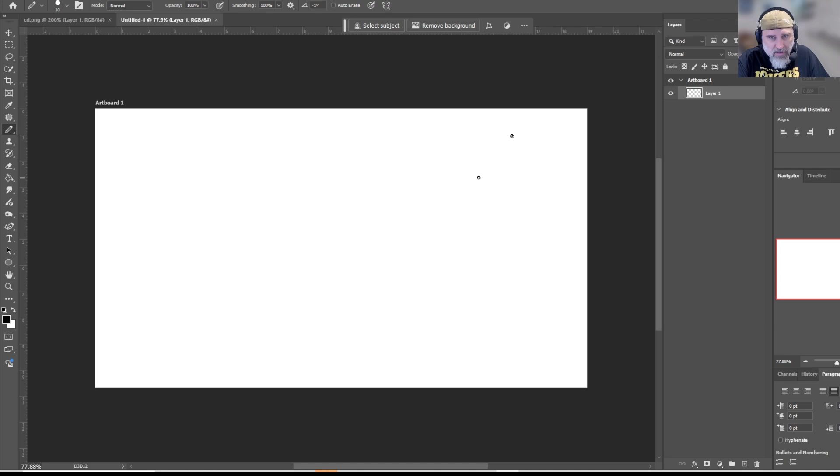So that's not what I wanted. Anyway, see, it's got a hole in the middle. What I was thinking is, I've got a wall. Photoshop's not the best thing to do when you're recording. I was thinking a little bracket that could hold the CD. Basically the CD goes right here. It's a floating shelf. Let me do maybe a little side view. Why is this so slow today?

You know what, Photoshop's not the right thing for this. Let's just kill that and go straight into Fusion 360. I'll just draw it in here and explain what I mean.

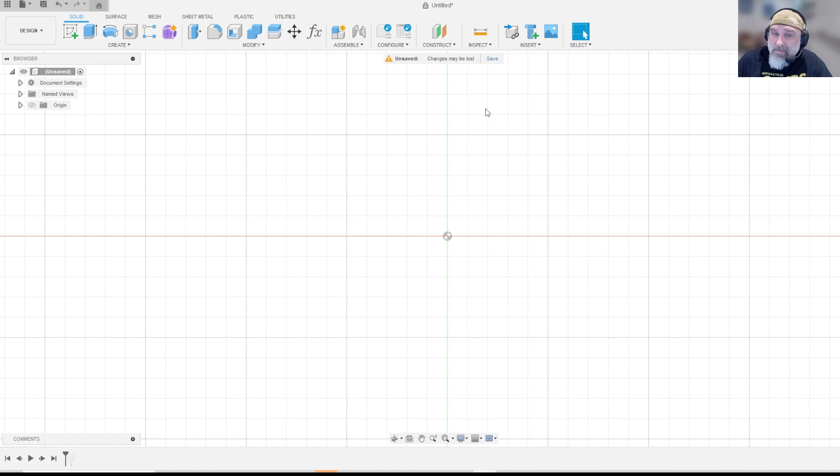Let's create a sketch, start from the top. What I want is, actually before I do that, let's go back. Move my graphics tablet out of the way. I guess I could start over this video, but you can follow me along. First, let's set up some parameters. If you haven't used Fusion 360, this isn't really a Fusion 360 tutorial, I just need to do something with all these stupid CDs.

So the diameter is, in millimeters, 120 millimeters. If I learned how to type, outer diameter. I watch all these videos where everybody does things perfect because they cut all the bad stuff out. Alright, so that's 120 millimeters. If you're curious how I get that, calipers, CDs.

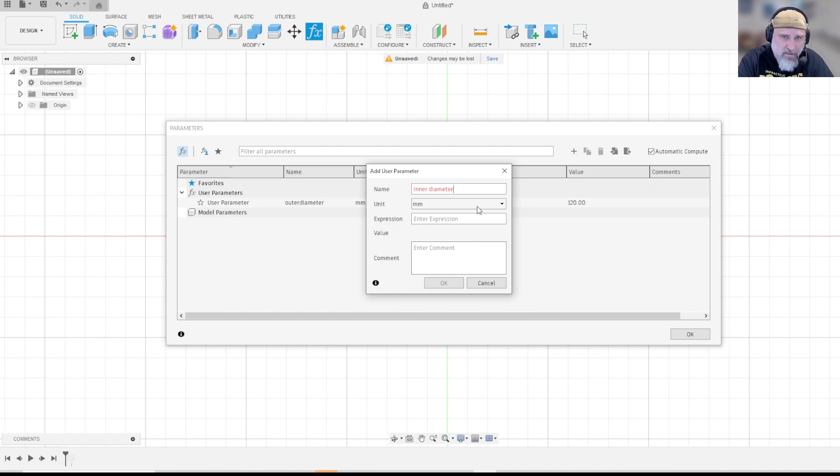Inner diameter, without a space, is 15 millimeters. The thickness is 1.15, at least for the ones I have. Oops, did not mean to do that. Okay, hit OK. So now let's create a sketch.

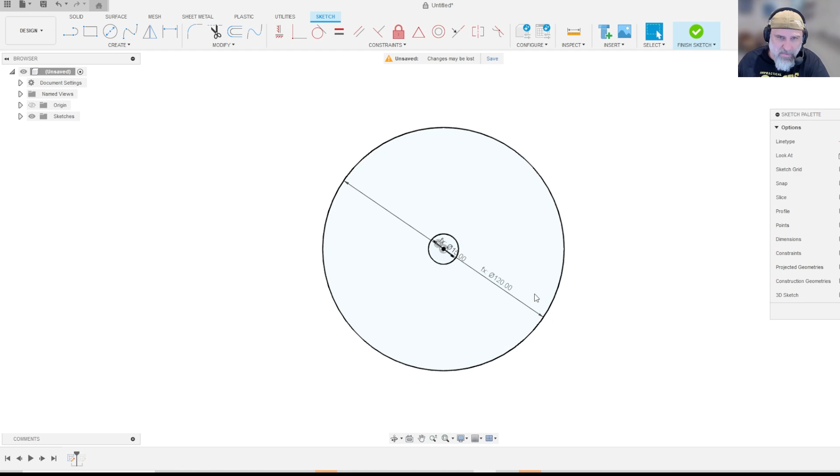On the top, I'm going to do inner diameter, hit enter, outer diameter, hit enter, drag these over here, put them at an angle, actually put them up here. Close Photoshop. Anyway, it also says in Photoshop, I found a picture of it, just to make sure.

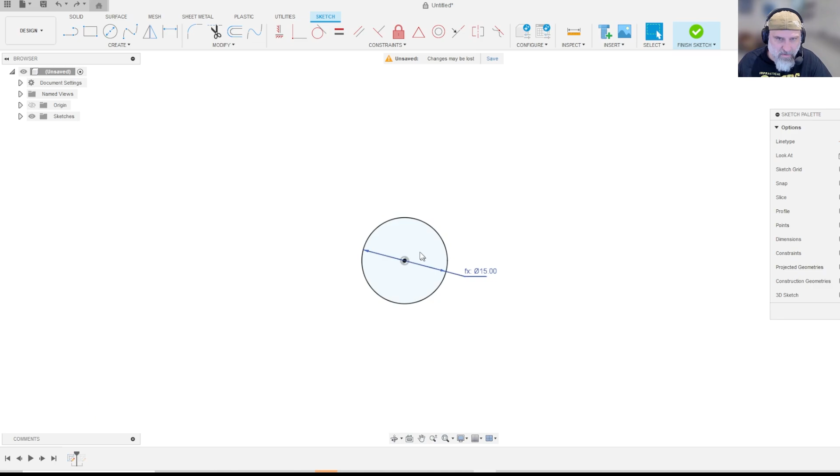Does that look off from the center? Now I'm confused by that. Delete, delete, delete. Let me go. Undo, no undo, there it goes. Yeah, that's the center, it's weird. Dead center, that one's off. How was that one off? There it goes, outer diameter. Hit enter, drag these things out of the way.

What do I want to do? I want something simple, I'm thinking it'll cover. Let's do a square. Touch it to the middle so it gets a straight line. Touch it over here so that it goes straight. Fine, I'll make it go straight after that.

Let's go with 65, sure. And the tangent to make sure this line is touching this line there. This line touches this line.

Since we're 3D printing, I don't want to use too much plastic, so I'm just going to cut this. Let's go to the center, to the side, click. Go here to here, make some lines. Alright, good. So what do I want to do with this?

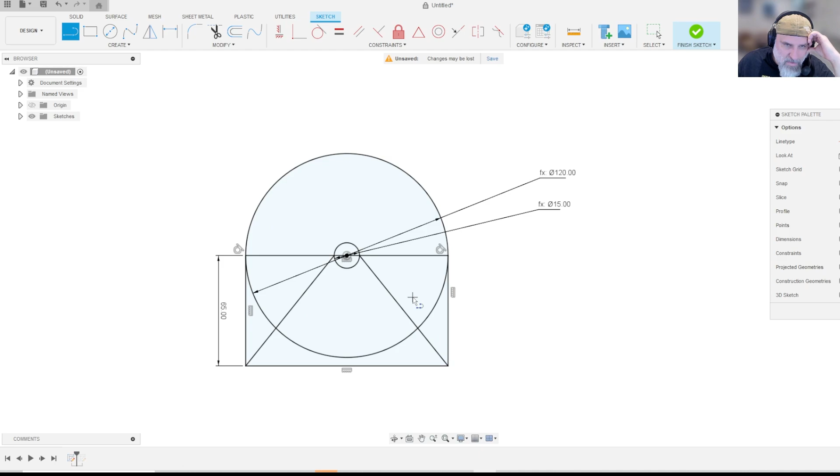I want it flat, or actually I just want it straight. I don't know how creative I want to be. Let's see, we need this. Actually, what I want is to make a square. Escape, from here to here.

Let's go down, so that should be, if I could spell, outer diameter, should be the same size. And then this one, let's just make it 2 millimeters. Probably don't need that, I'll explain that in a minute. Okay, let's finish this sketch.

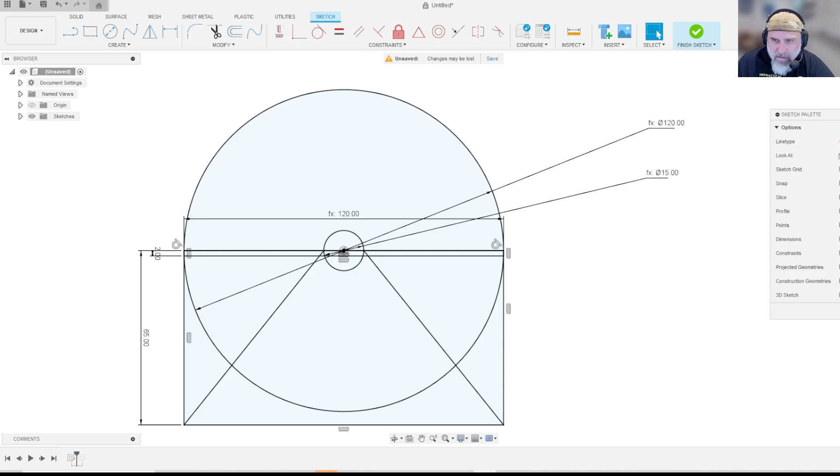That's from the top angle. So from the side, I need something to screw into the wall. How big do I need it? CD, it's... what is that? Let's just go 30 millimeters and see what it looks like.

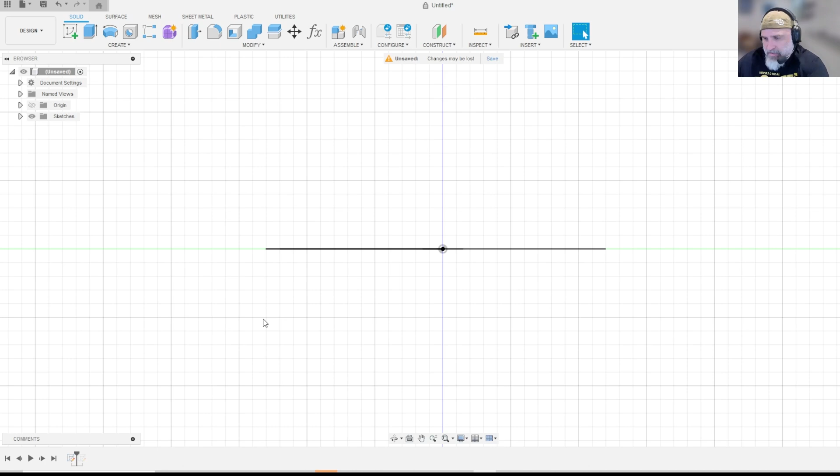So let me go create sketch on the right plane, and I'm going to angle it down just to see. So that's 65 millimeters out. So I said 30, so that means start at 35. So let me just create a square that's 65.

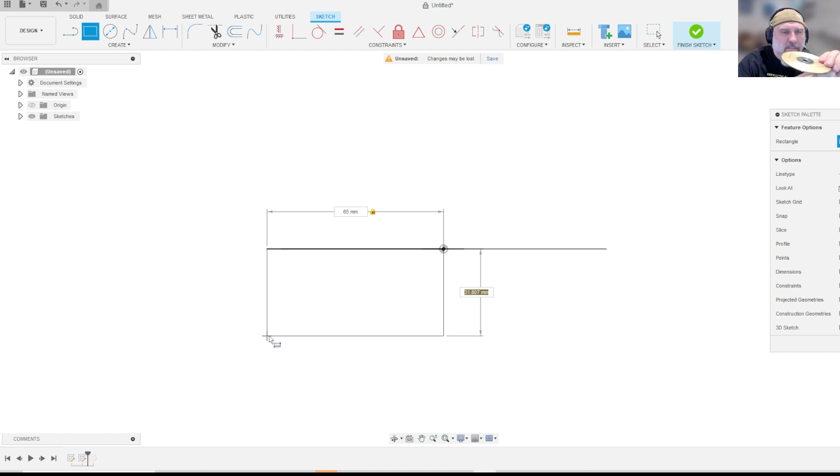Don't need that, just needs enough to hold probably 2 screws. Let's go with 40 millimeters. So, okay, and then I want another one. I said 35, I believe. So let's do 35 by 40.

That way it just cuts it there. And then I want from here to here, but I also need some thickness in this. But this will give it the thickness, so it'll expand up, and then I'll expand that way. Let me think, oh, I know what I can do. Let's go find the center point right here.

It's not a circle, but shouldn't need that much material. 30, so we cut that. If we cut that off, we give it little brackets. I'll explain more what I'm doing once I figure out what I'm doing.

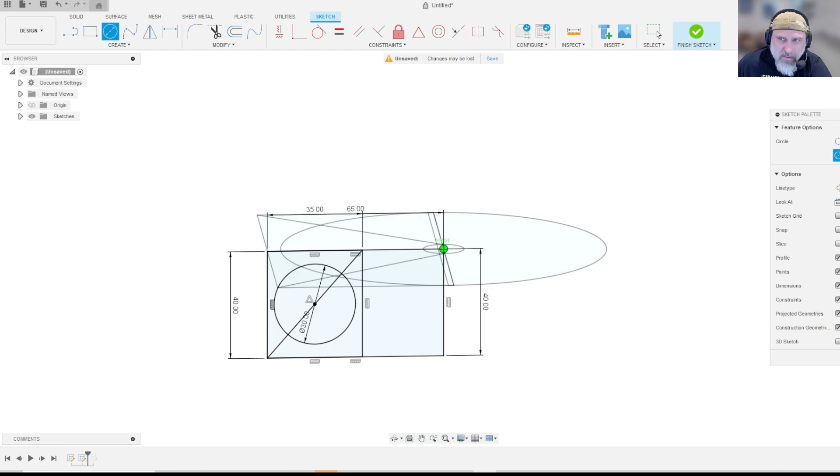I'm just designing in CAD real quick. Let's go ahead and put 2 little circles here too. Now what does 15 look like? You know what, let's just go with it and see what it looks like. Once I throw one more circle down here. 15, 15 is too big there. 10, oops, 10, let's go with 10.

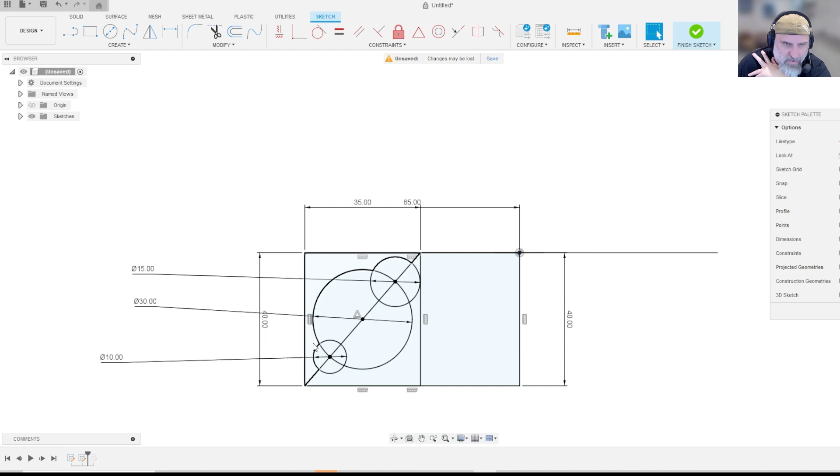Okay, and then drag all the numbers away because I want to see what I'm working with. So that's the shape right here that I'm getting. I'm going to extrude from that side, and then that. And then I'll work on the next sketch after I'm done with this.

Okay, so let's go in here. Let's turn off sketch 3. Let's go to the top. Okay, so what I need first is I want to have this.

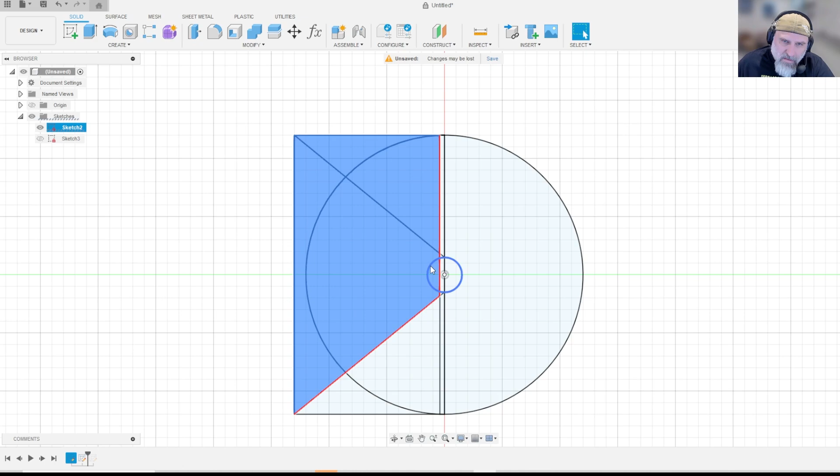Do I want to have that? Does it need that support? I don't think it does. Don't think it needs any of it. Well, let me think for a second. I'm trying to make this with the least amount of plastic possible, because that's the whole point of using the CDs as shelves - that's what's going to drive the strength.

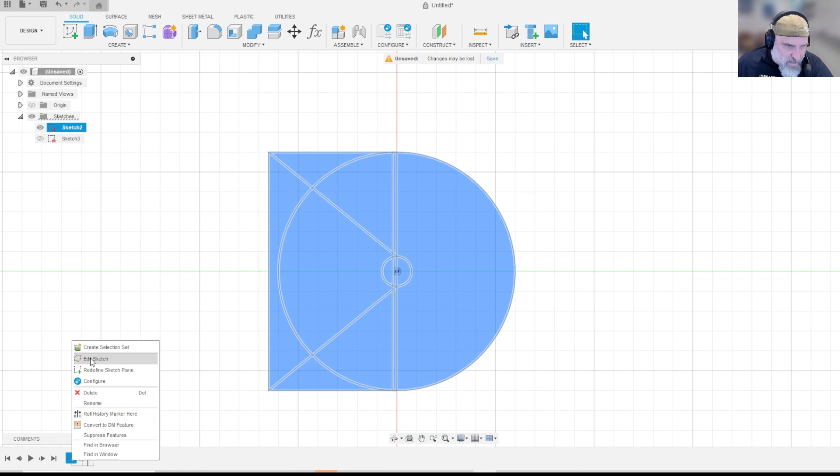Actually, I have an idea. Let's go back to edit this first sketch. Let's do a few more things. Move where I need you.

Alright, so let's go this spot to this spot. Oh come on, stick - there you go. And then stick there, perfect. Let me make sure that this is tangent to this. We don't want the lines blue. Let me put in one more box in here.

This one, let's go to just 30. So this, that - okay, let's go with that. Finish sketch. Give me somewhat of an angle so I know what I'm looking at.

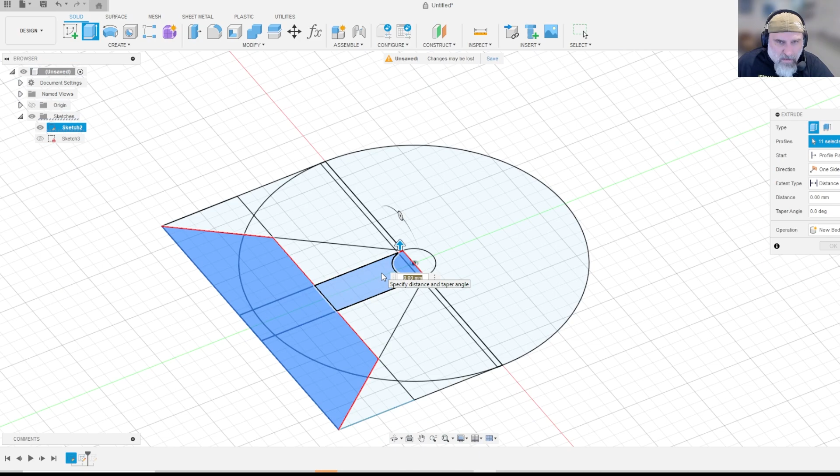So I want to extrude. Oops, did not want that. This and this - oh wait, gotta remember to get those. Alright, start with that, E, and then we're gonna go thickness.

So that's the thickness of the CD, because I figure might as well make this the same thickness. Alright, that's what we got so far. Turn the sketch back on. Now I need to make the part that holds the CD. So let's go undo the body for a sec.

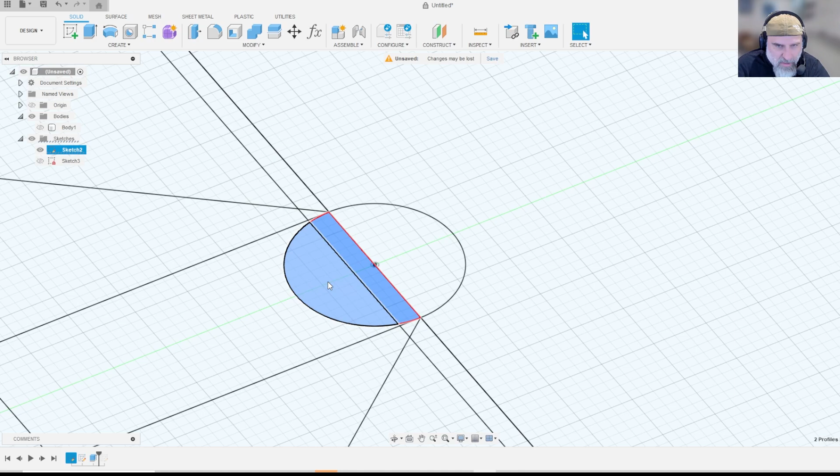So this part is going to extend this part and this part and this part, right? Yes. And then we're going to push that up. We're going to start on the profile plane of the top of this with the distance of the thickness. And we're going to have a taper angle.

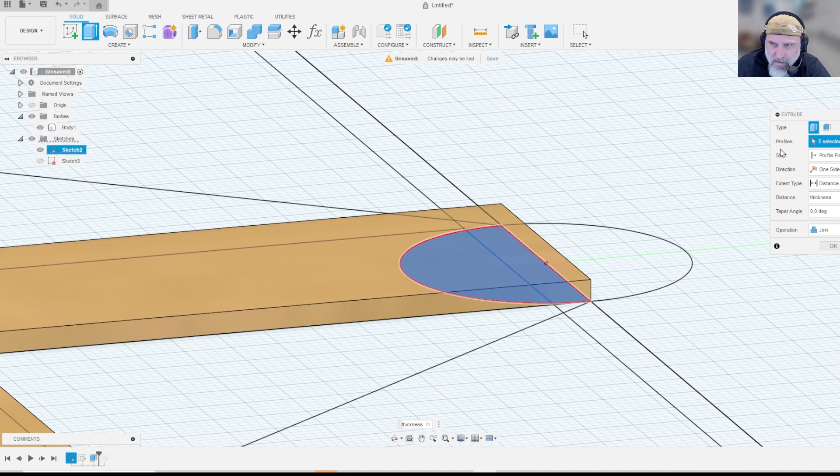Let's take a look at the... wait, we're going to join, not cut. Oh, offset is what I meant to do. Right, we'll do offset, this. Why is it not doing it? Okay fine, offset - having issues. Anyway, now you see what I'm trying to do.

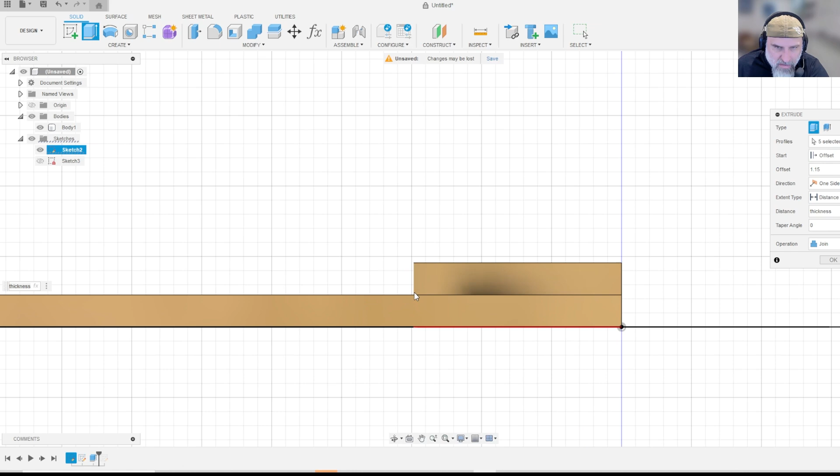And then I want a taper angle of 10. Now is that making the top bigger or the bottom smaller? I guess that's the question. So if I put that right at 0, it's making the top bigger. So what I want is the bottom to go in, not the top to go out. So I'll worry about that in a second, because it should be a perfect fit right now as it is.

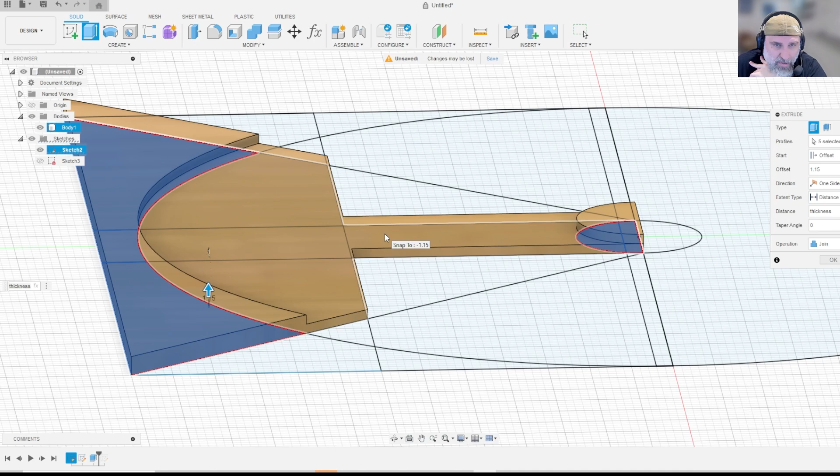Actually, do I want the thickness as the CD? What I want is it's going to have something to bite onto, but not too much, so maybe just the taper will do. Yeah, we'll see, I'll print it out and see what happens. Okay, let's go with offset, one side, thickness, join, hit OK. Let's get rid of sketch 2.

Alright, now for this side, go to sketch 3. We want this, I want that to extrude. Actually, I want it to be the whole length of this, so both sides - I think I'm going to have to symmetric. Do it all the way and then cut it off where I don't want it. It's interesting looking, but I'm okay with that.

Guess I don't need it the whole way. I just need it over here and over here. We'll call this join, hit OK. Now let's go back to sketch 2. Let's take this, all of that. Right, go back to this angle.

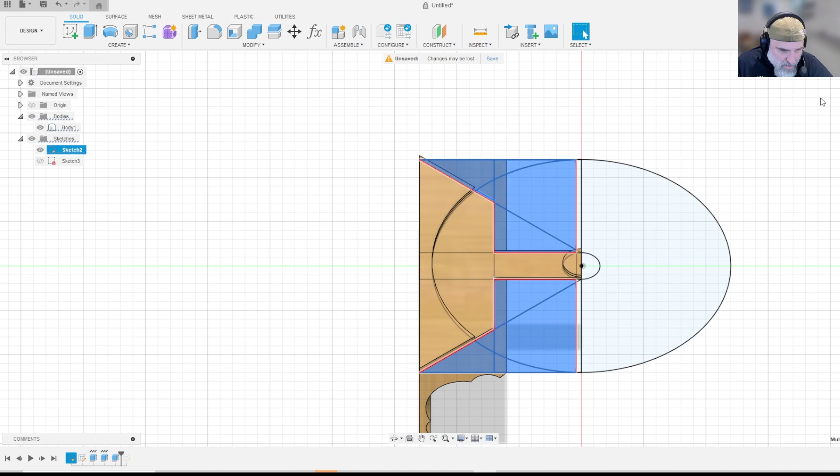Extrude this way and cut it all off. Alright, that looks a lot cleaner. Turn off the sketch. Interesting. I know it's kind of weird looking.

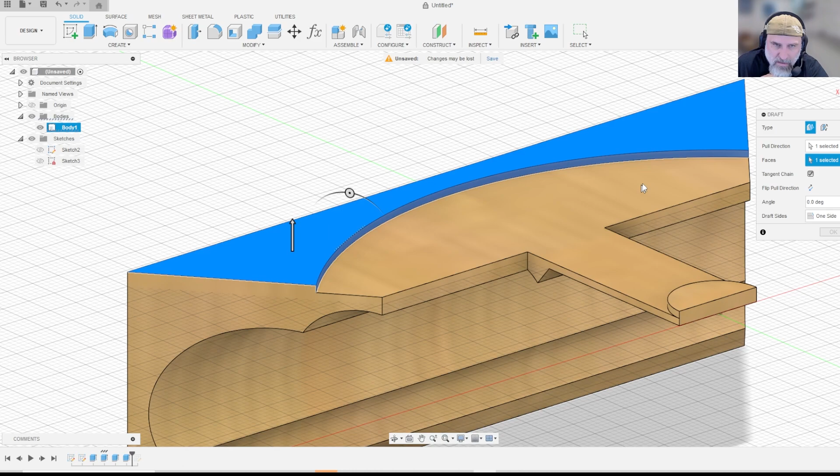Don't worry, I'll make it weirder. Alright, so how do we make the CD stick in here? That's what we're going to do right now. Okay, we're going to take this little angle right here. We're going to draft it. That's the face. The pull direction is this. And which one gives us the best angle to look at it?

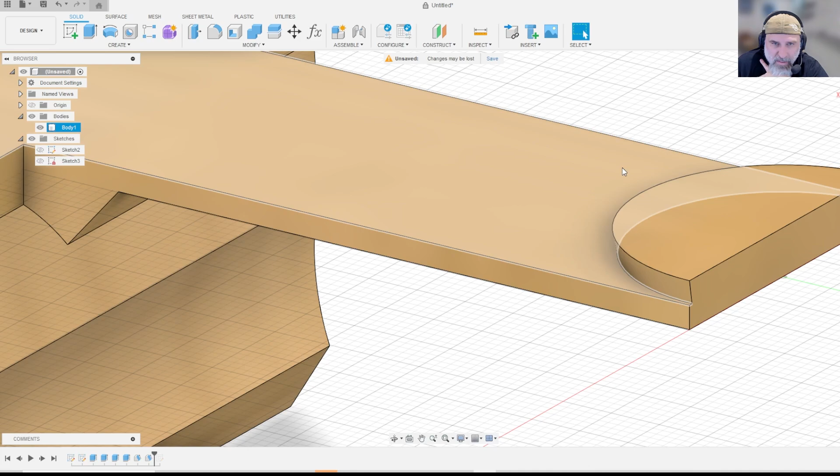I guess this one. There it goes. Yeah, curved in. I'm hoping that'll lock the CD in. Alright, hit OK. Do the same thing with this. Auto draft. This direction, 10 degrees. My CD's rounded, I don't know. We'll figure it out.

Now let's make this look a little bit more interesting, because that looks kind of silly. Do I want to chamfer or put some holes in it first? Let's chamfer it first. Let's see if this will let me actually fillet.

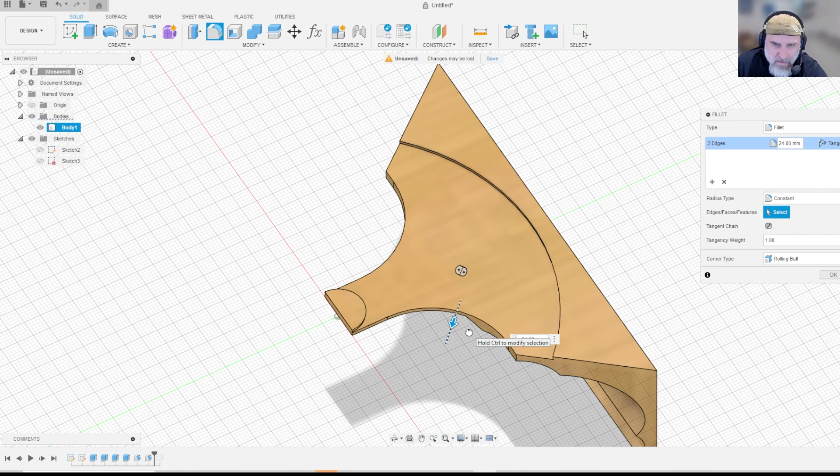Grab this corner, grab this corner. See if it lets me pull it out a little bit. There we go, that looks a little better. See, a little rounded out. Let's go with 15. That looks better.

Anything else we need to fillet? Actually, this inside edge, since it's a rounded thing, let's go with this. Let's see what just 1 millimeter looks like. Way too much, let's go with 0.2. There we go, just when it's slightly rounded on the bottom.

Might as well do the same thing over here. Was it 0.2? There we go. Hopefully that makes it pinch a little bit better. If not, we can always come back. Okay, so let's hit OK.

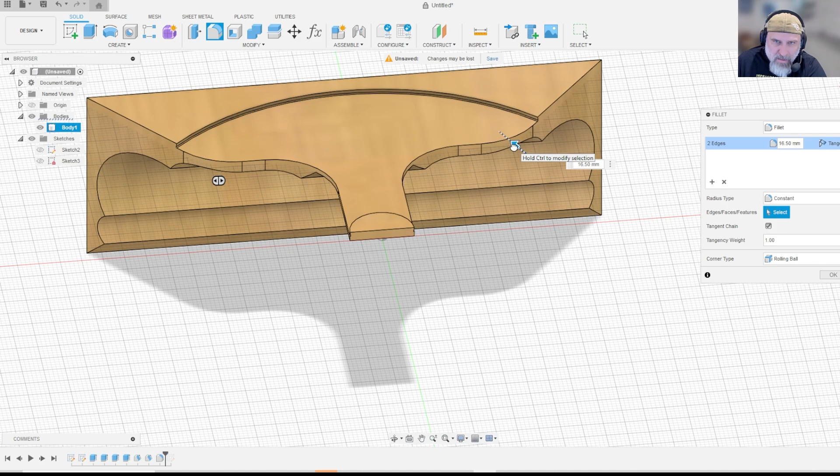Now let's give it a little more. Let's do a fillet. Where are you going? There we go, with this one let's roll that in a little bit, round it off. That's good. Alright, now let's do that with these top corners.

Now let me see, can't really do that with that very easily. Yeah, we can see what happens, see if it gives me an error. That one, that one. No, it will do it. Okay, don't want to go too far. 8 does not work, 7.5.

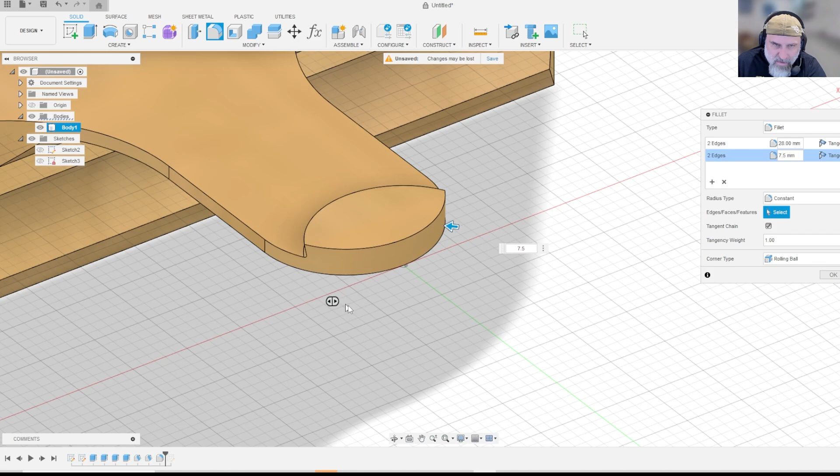That looks pretty smooth. Alright, let's do these big angles over here and here. That looks a lot better. Might as well do the bottom, see what that looks like.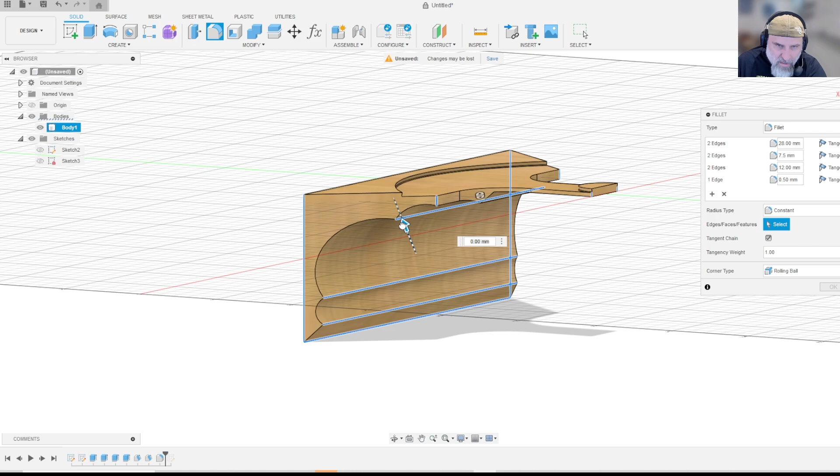I just don't like sharp edges. Alright, this one, and this one. Just slightly. Oops, that makes it a lot smaller. But I'm okay with that.

Oh, one more, this one. I mean, does it need all that material just to hold it to a wall? I have another idea. Okay, let's hit okay with this.

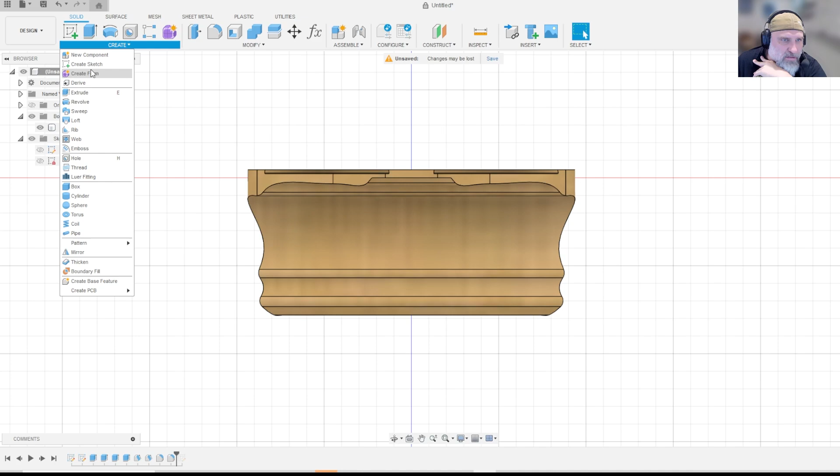Let's go with this angle. My sketches are not of this angle, right? Okay, perfect, so let's do a new sketch. Create a sketch on this plane, we're going to do from here. Actually, it's just a straight line. From here, straight down, it doesn't matter. 50, it's just to make it a construction line.

There we go. Alright, so from there, let's go with a circle somewhere around here. Let's cut out a bunch of this material. How's that look? It's fine. Alright, I need to create a rectangle from the center that goes to, let's call it 65.

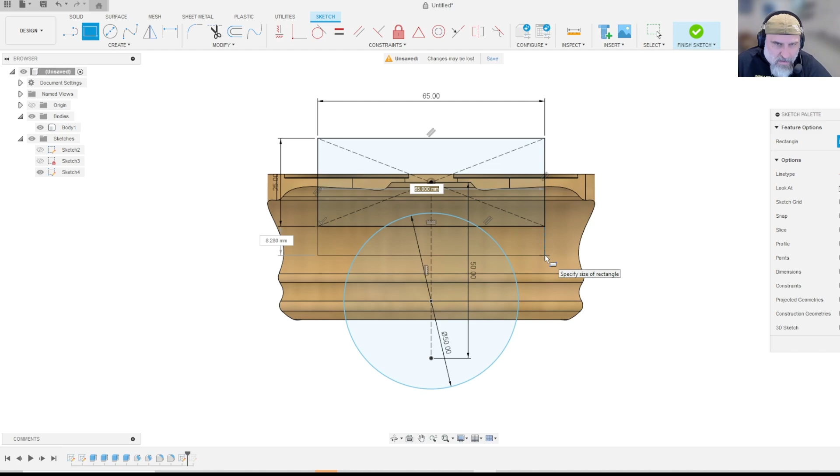25, let's see what that looks like. Go with that. This one's 65 by, let's go with 10. Does it need 4 screws? Probably not. Actually, technically it should only need the top screws. So let's just do this, and then we'll create little circles here.

How big is a screw? Do I have any screws handy? Let's say we're going to use a drywall screw. That would be... oh, I think I have some in this box. I do, so it's 4 millimeters. The base and the top is 8 millimeters.

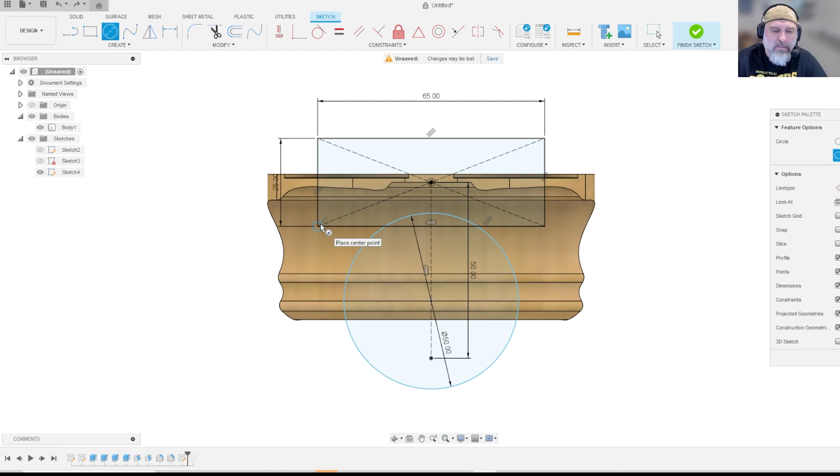So let's make a 4 millimeter hole. There's many ways you can do this, this is quick and easy. Alright, so first what we're going to do is take this big circle and extrude it straight through the object.

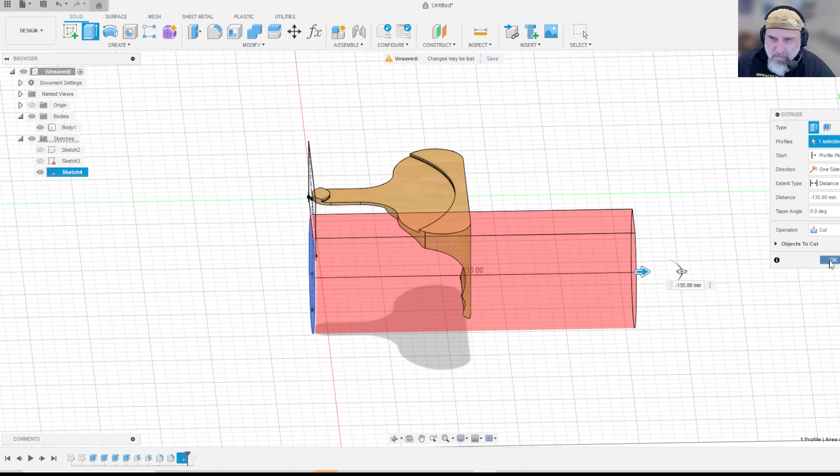Cut that off just to make it look a little interesting. Do I want the top part? Let's make it flat, that works. Hit OK, alright, now bring my sketch back.

Take these 2 little circles, get the corners. Guess I could have made the square construction line too. There we go. Hit E, extrude, grab the arrow, drag it through, cut some holes in it, hit OK. Cool, get rid of the sketch.

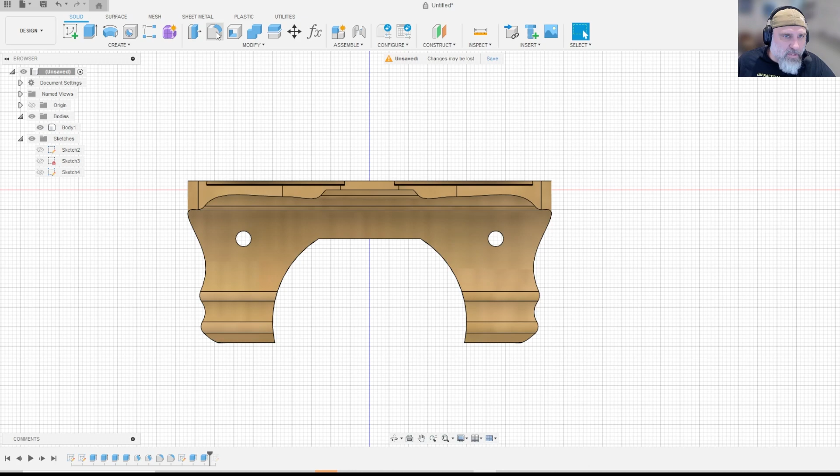Now we're going to click on this, shift, click on this, do a little chamfer. I don't know how big the screw hole is, or the top of the screw, but that'll help a little bit. I'm just trying to make something quick just to see if it works. Hit OK. And one last thing, let's go ahead and soften up these edges. Let's see if this will work.

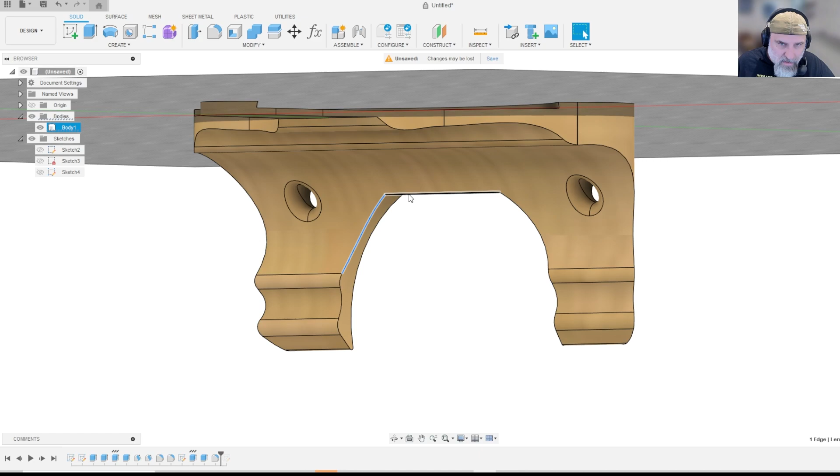Will you round out? No, perfect. How far can we go? Yeah, good enough. I'm just trying to play around with something.

Now let's do one more thing. Let's go back to the top view and cut some more material out. That just looks funny. Alright, let's edit this sketch.

Let's create a new sketch on this plane. Let's do a polygon, straight off the middle. Let's go with 3. I want to do this.

Finish sketch. Select it. Create a pattern. Let's go with a rectangular pattern. Can I do that? No, I can't do that. I have to do it inside of the sketch. Create rectangular pattern. There we go.

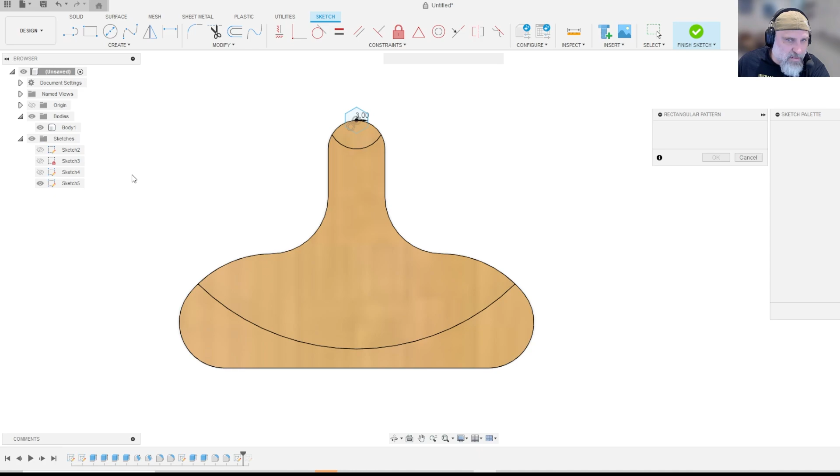Double click, that's what I'm trying to do. Alright, doesn't matter there. Symmetrical, right there, and then go down here. How many of these do I want?

Let's make a bunch of these. I want the bottom to be over here, the edge to be over here. How many can I go? That's fine, this goes down to 10.

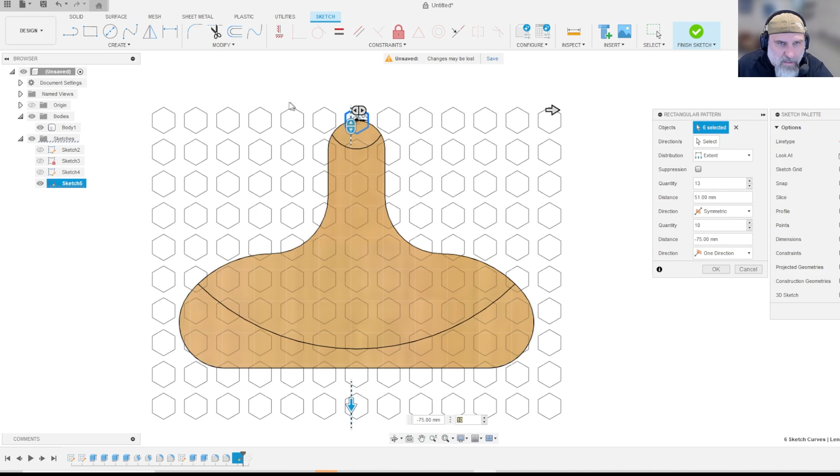I want these to be offset a little bit, but I don't think I can do that unless I create multiple, and I don't feel like doing that right now. Let's go with that, at least it's going to be even. Alright, let's just finish sketch.

Now from this, what I want to do is unselect the body. I need the body there. Oh, my sketch is on this side of it - that's the top one, this is the width one. Let me select this for a second so I can select these. Come on, alright, let me see what I've got.

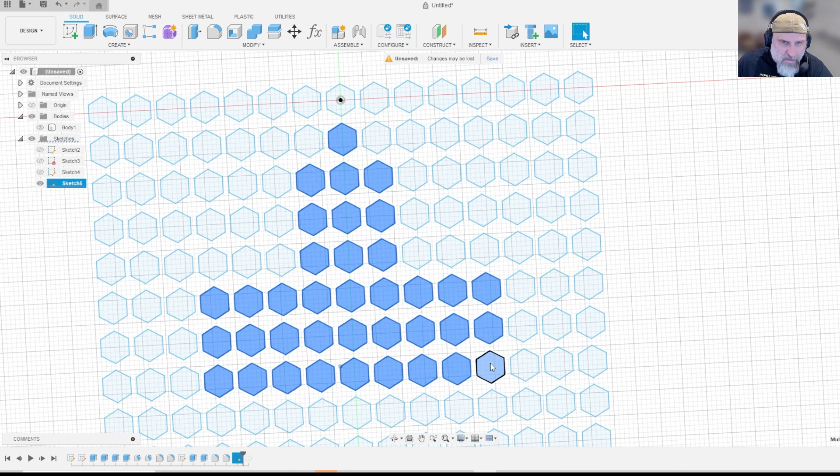I don't want these, I don't want to cut a big hole in the shape. Dang it, don't want that selected. Those are fine. Ah, crap, just unselected everything. Nope, let me start over. That was annoying, I'm just trying to remove some material.

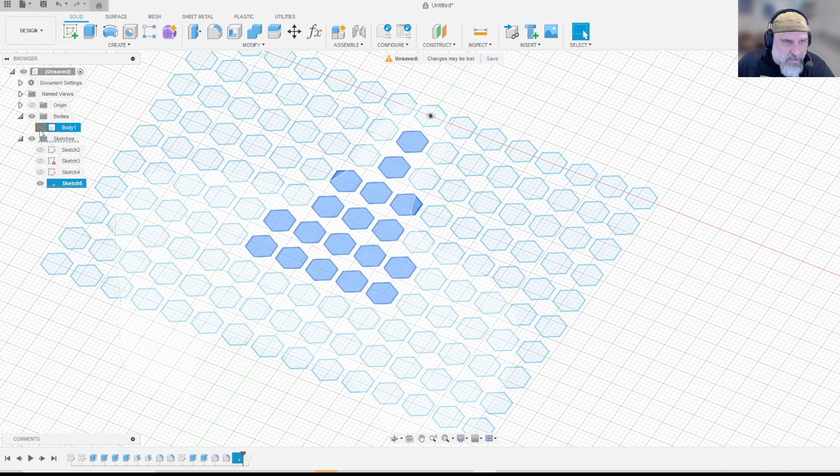I thought a hexagon pattern wouldn't look too terrible. Alright, how many is that? 2 more on either side. Let's go 3 more, but not these 2. Survey says it's going from there to there.

So let's extrude. You know what, I'm going to do that last row. Cancel that. Oh crap, I don't want it to select again. You know what, screw it, I'm just going to print it as is. I don't even know if it'll fit.

Let's see. File, export, CD holder, export. Exported CD holder, and let's put you on this side.

There's nothing rounded on this side, right? Yeah. Do we want to do it in red? Whatever. Has a floating cantilever - oh, that part right there. Yeah, let's go to this.

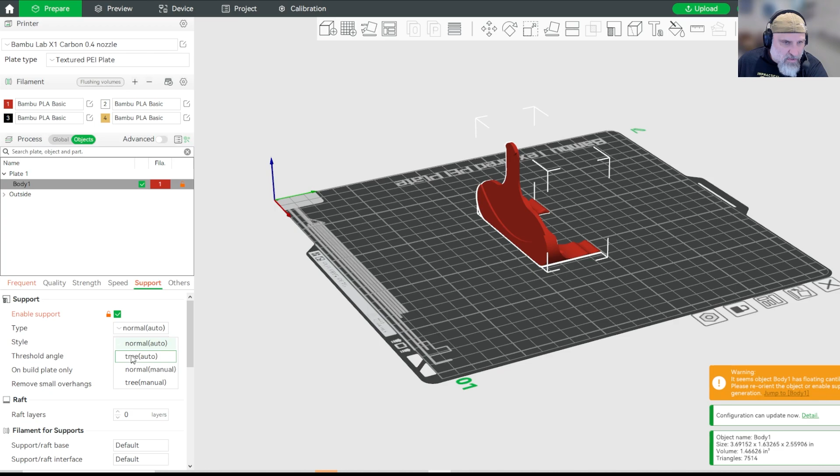Support, enable support, let's go with some trees. Build plate only. Preview - 40 minutes. Alright, let's see if we can cut that down, because I don't even know if it'll work.

So, fill density, let's go with just 8. Infill 8, I'm okay with that. See if that helps - yeah, it took off 5 minutes. Let's see what it looks like. Print, send, and I'll be back in 40 minutes.

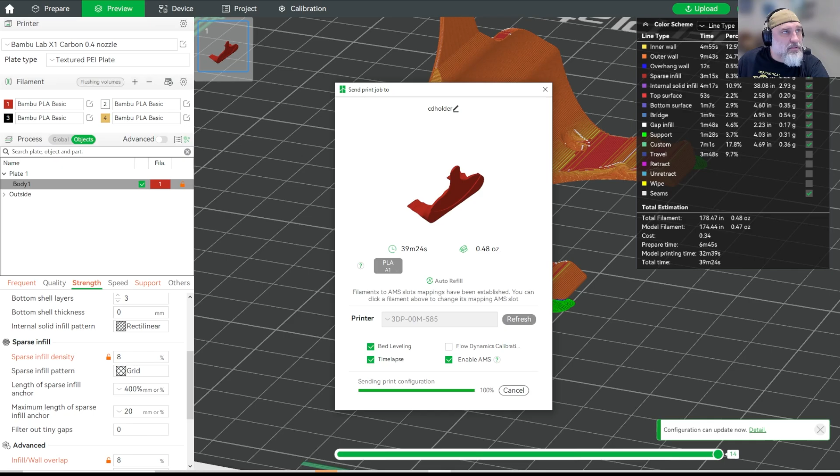Made a cute little thing. Unfortunately, I don't think I gave it enough of a lip. So it sits on nearly perfectly, but I think due to how thin this is, it's not quite sticking. So I need to make something that makes it stick a little bit better.

Because the whole point is to have it sit there and then turn into a little shelf - put like an action figure or something for the kids, I think they'd like that. So let's make some little modifications.

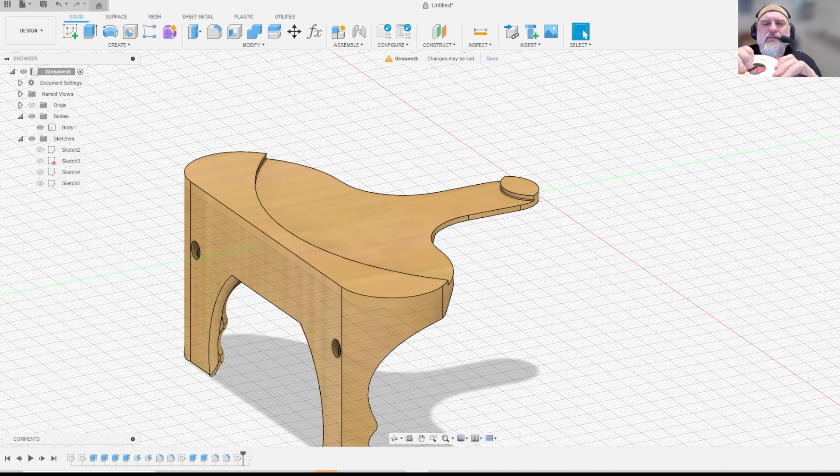What do I need to do? So is that actually going in? I can't - yeah, that's flush. Alright, so what can we do?

Oh, where's my mouse? So this part that got extruded, let me see - it was this one. Let's edit this feature, and it was the thickness.

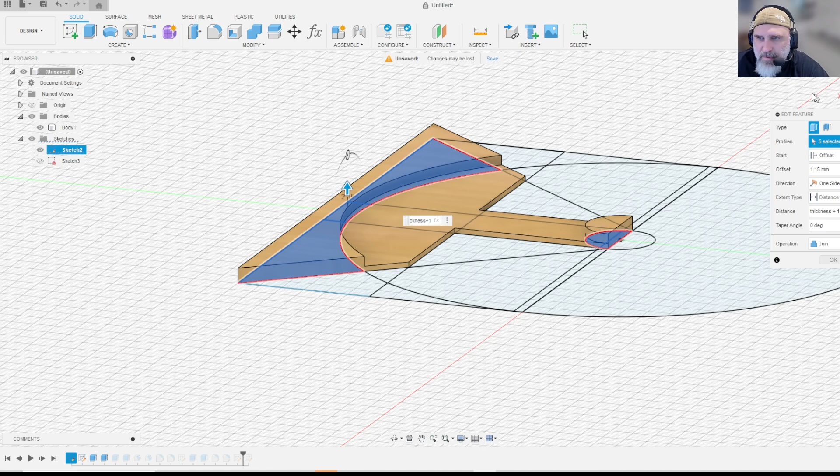And we're going to go times 1.5. We're just going to do plus 1, so add an extra millimeter to that, and that'll make this thicker. That way I can actually create a lip for it. Hit OK, see what it looks like.

I wonder if that'll just be enough as it is. Well, then it's going to be over the top of this by a millimeter, which will mean the shelf is kind of offset. Let me think - do I want it that high? I mean, a millimeter really isn't that much. Would you even notice? Right now it's flush.

I mean, if we're going to make it, might as well make it perfect, huh? Should we go 0.5 millimeter? Whatever, so it still has got that cup. Let me see - what is the distance between... Inspect, measure the distance between this and this. 52 point...

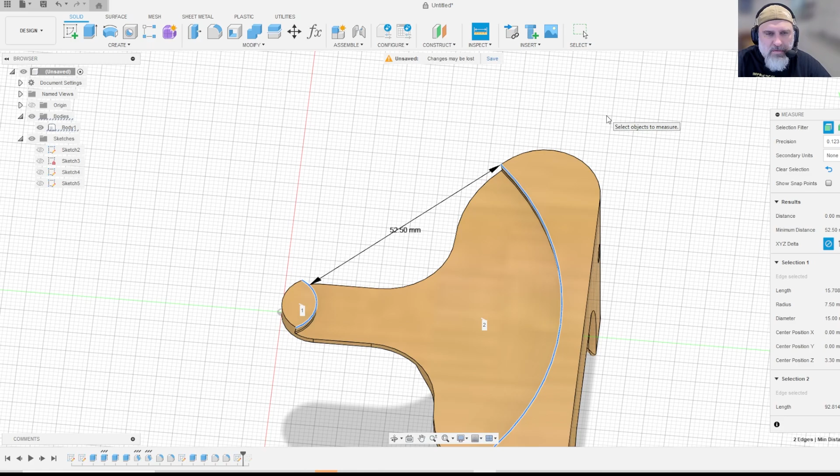My calipers say the closest point is 52.5, so 0.5 gives it a little play. What about the bottom edge? Let's adjust this so we can see what we're talking about.

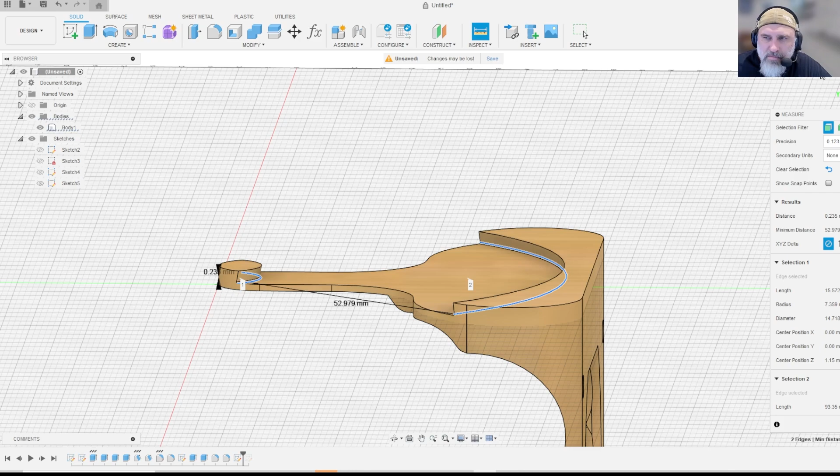Let's inspect and measure this. That's almost 53. How big does that make it? That'll make it sort of loose when it's all the way in there, which we don't quite want. So increasing the height increases the draft of how much it goes down, so the CD is going to be half height between here and here.

I think we go back into this extrusion. Close this real quick, and don't put it quite that much. Where was it, which one was it? This one? Yeah, edit the feature. Instead of 1, we'll do 0.5. Hit OK.

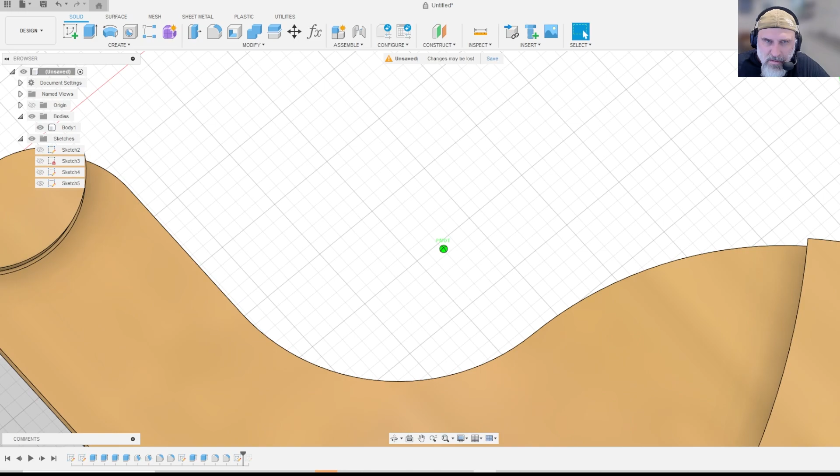Make it interesting. Do we want to give it an additional lip? I don't know, I wonder if I print this upside down, if I can just get that piece. Let's do it anyway. So let's do it before we get all these fillets added.

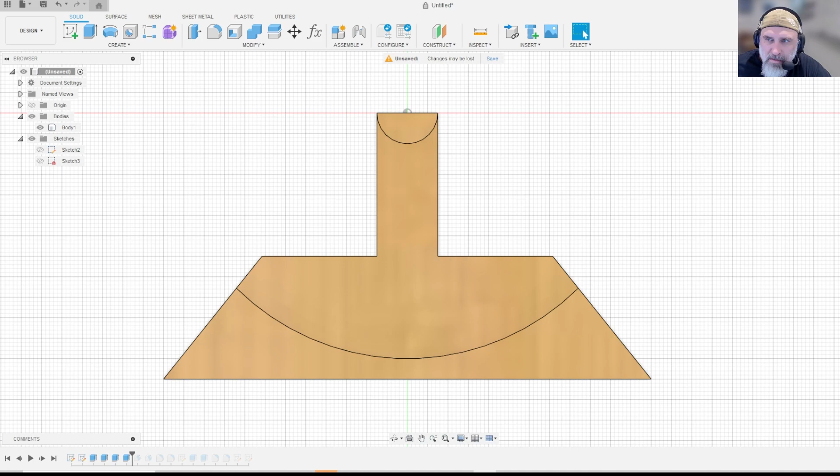Let's go back all the way over here where it's still squared up. What I'm going to do is go to the front, create a sketch on the front of this that is 0.5, actually 0.45 - oops, did not mean to do that. 0.45, hit OK.

Flip it back over so we can see what we're talking about. Actually, let's do this - let's take this piece, that'll make sense in a second. Extrude this way, new body, hit OK. Let's do this, click it again, just this part.

Extrude, let's go offset. Now the distance between here and here should be the outer dimension divided by 2 - technically the outer radius, or the outer diameter divided by 2. Oh wait, negative outer diameter.

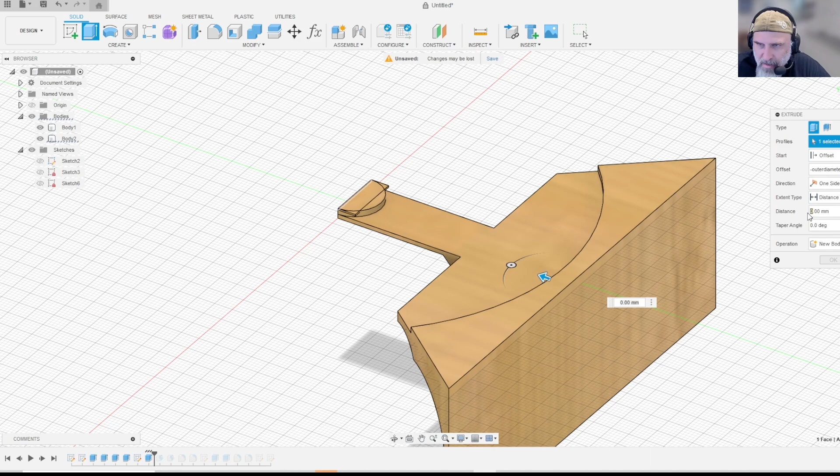And then let's just do 1 millimeter, see what it looks like. Makes just a little lip right there, which I'm okay with - 1 millimeter, which is the thickness of the CD, which should be fine. Okay, let's hit OK with that. Oh crap, let's not hit OK yet, edit the feature - we want it to be a new body.

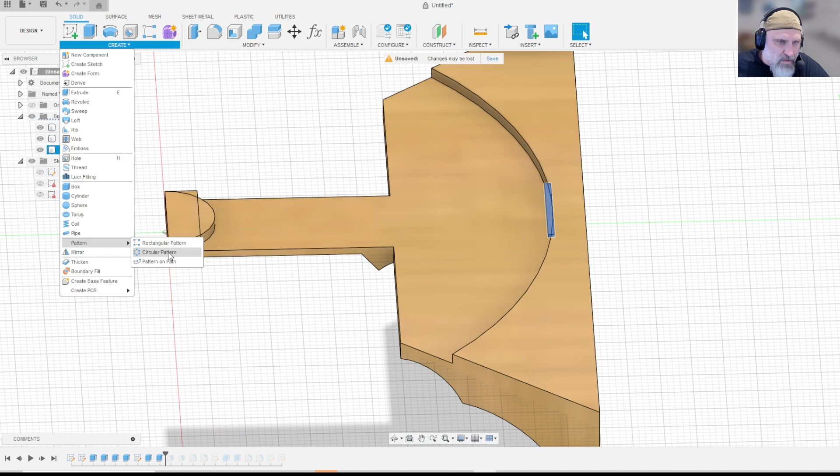Hit OK. Now we're going to take that new body, let's look at that body. We're going to create a pattern - this time it's a circular pattern of that object, and the axis is going to be... can we do right there, see how that works?

Nope, that does up and down, wrong axis. Okay, what if I just do this? That's what I wanted, okay. It's a partial distribution, and get back over here.

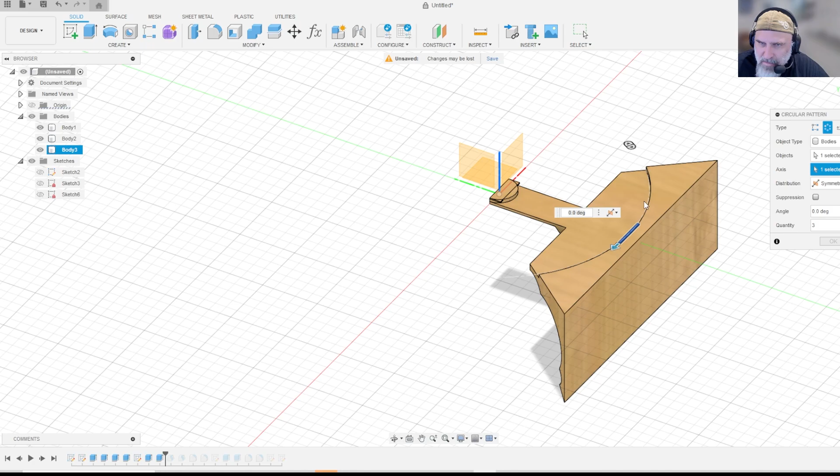Come on. Wait, no, that means I want more. I want this to go here, but I want it to be - would symmetric work? There we go, so that'd have a lip on each corner. Doesn't need to be all the way over there, that'll work. Hit OK, and now let's make these actually fit.

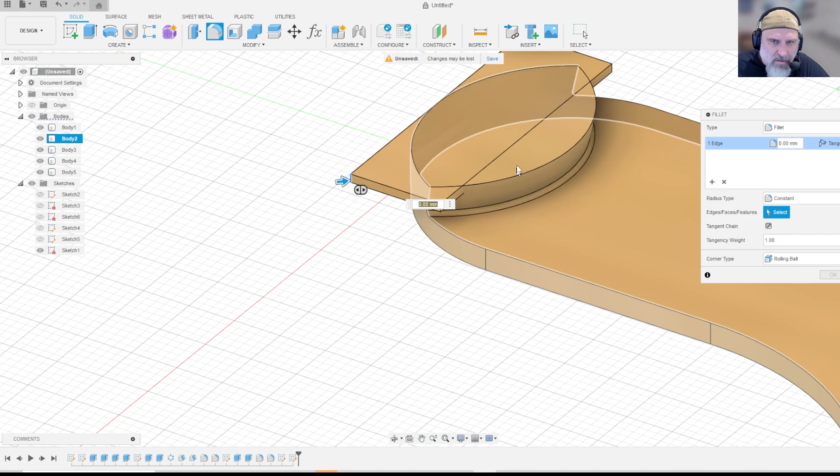So let's slide this back over, see what it looks like with everything else rounded off. Good, alright, and let's just fillet everything. Start with that corner, circle this thing around, that one - pull it in smaller than this, because that's fine.

Take this one. One of these days I'll know which the shortcut keys are - I'm just learning Fusion 360 as well, just been playing around with it for a little bit. Alright, let's see what that looks like.

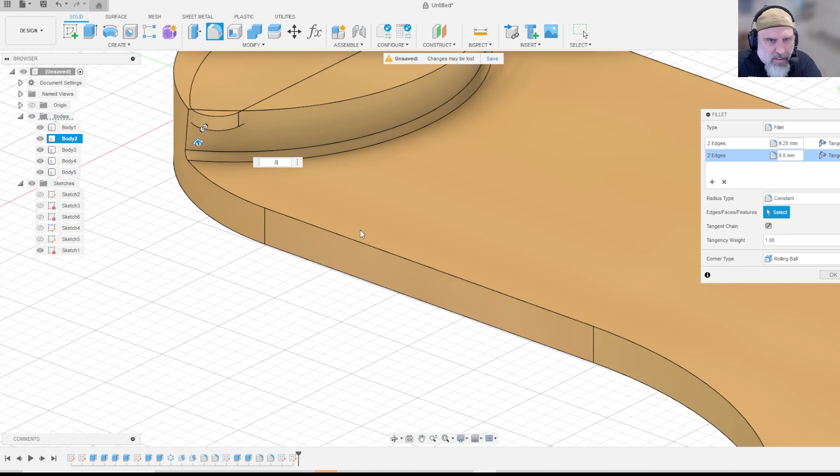Just a tiny little - let's go 0.75 to 1. So let's go with 0.8. Yeah, actually let's go with 0.7. Yeah, 0.75 will go. Can it still get inside of there without causing an issue?

I think so, I think we'll make it work. Alright, let's do the same with these other ones. You could technically do this before you make the pattern so they'll all match, but oops, yeah. Alright, let's make all these the same.

This one, this one - how far are we gonna go? A little bit, just need to make sure it holds the CD, and we have to make sure the CD actually still fits. That's fine.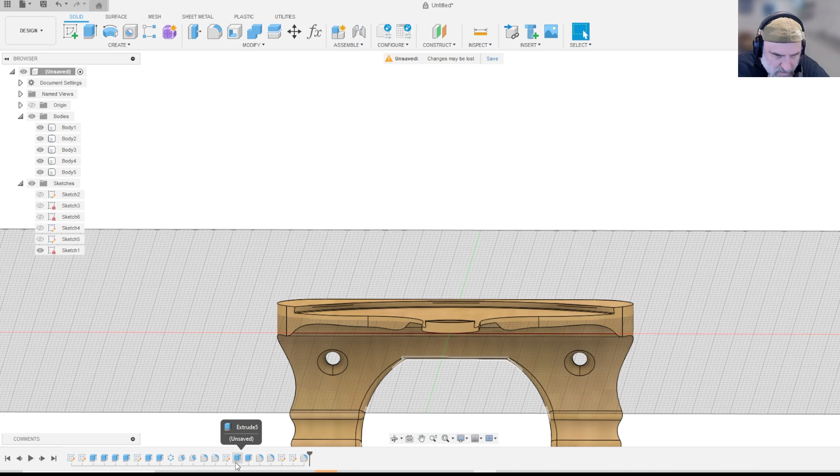Okay, now these holes are at an angle because of the way this is formed. I'm going to straighten those out real quick. Let's go back to - where did I drill the holes? This? No, this one right here. Okay, let's edit these - actually, let's first edit the sketch.

Edit sketch, go back. How big - where's that screw at? There it is, how big is the top of that screw? Say 8 millimeters.

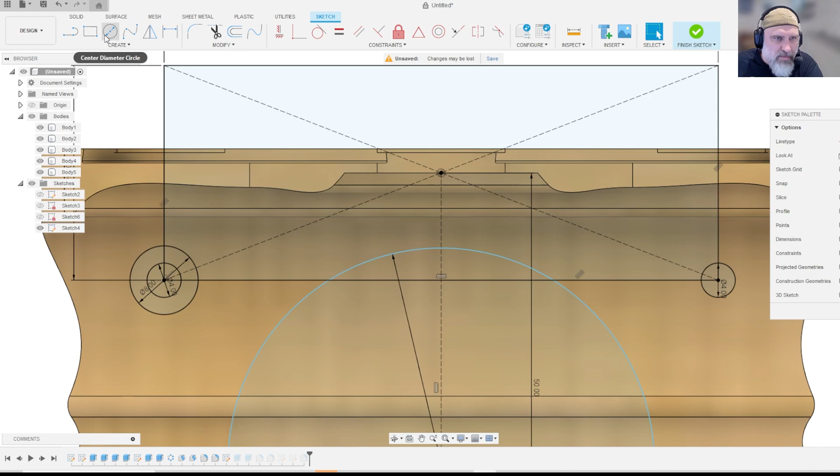So let's add some 8 millimeter circles right here. We could add symmetry and link them up and make them match, all that stuff, but it's easy just to do this.

Okay, now that we've made those circles, let's drag this back and turn my sketch on. Go to the front, go to the 8 millimeters. There it goes. Extrude, let's cut.

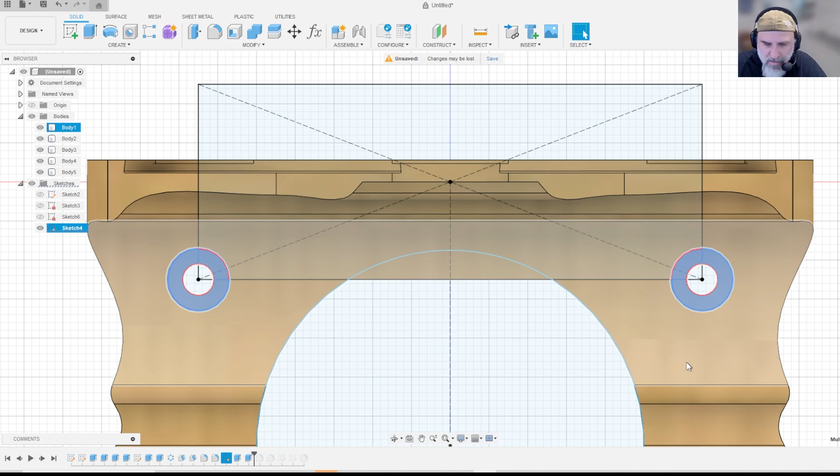Let's see how thick that is, that way it goes in flat and it's still got enough material. That's, I think, 3 millimeters. Should be more than enough.

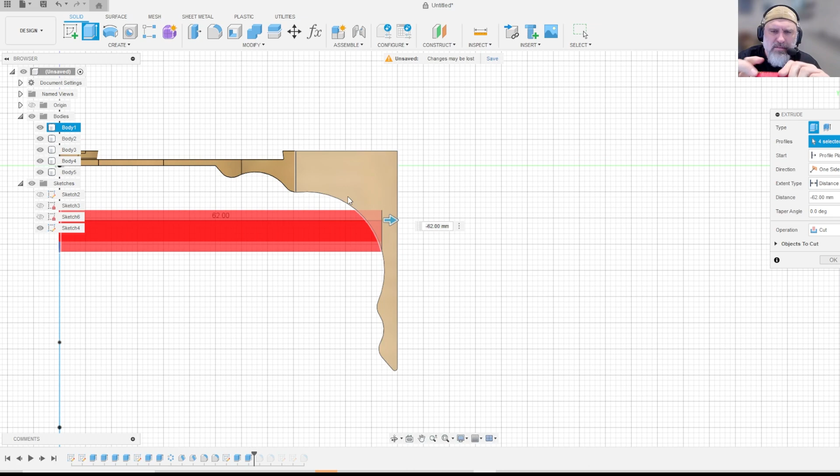So when we were 3D printing these previously, that snapped off. Might want to make that thicker. Actually, the bottom is pretty strong, that's just that thin piece at the top. Yeah, I might want to thicken that up. Okay, well anyway, this piece right here, that looks good.

This I might want to go thicken up. So let's first drag this over here to make sure the fillet works. It's not going to work on this one because we've changed the size. So I'm just going to delete it, and then we'll add one in there in a second.

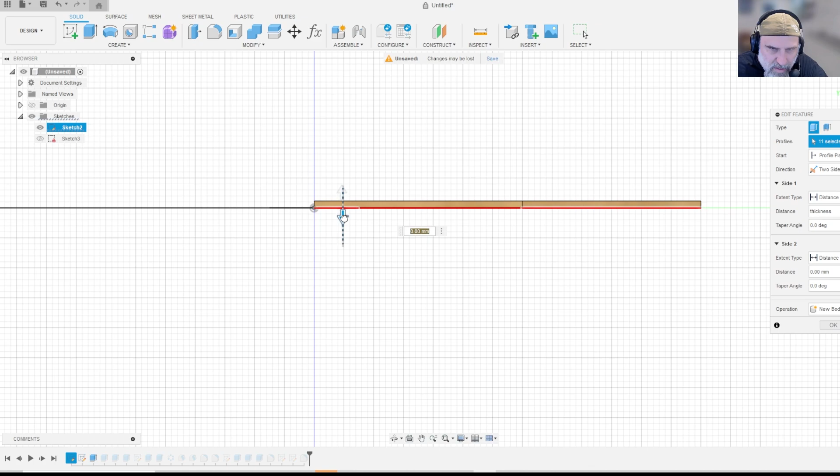First I want to go back and thicken up this extrusion, which is, I think, the first one we did. Edit feature, yes. So I'm going to do 2 sides, and I'm going to do this one down 0.5. Let's see what that does. Yep, it's just a hair thicker. Hopefully that doesn't screw up everything else ahead of time. Nope, it doesn't. But now it's a little bit thicker so it doesn't snap when I'm playing with it.

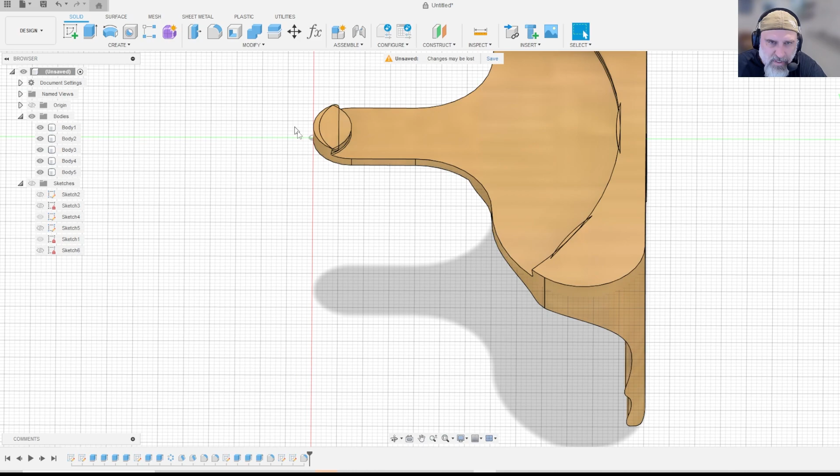Okay, so now what have we done? Turn off the sketch. We've added several little pieces, thickened it up, fixed the hole. Let's go ahead and fillet this and this, just a hair. Zoom in so I get how much it is. I think 1 should be more than enough. It's a nice rounded edge, so it matches the profile of the screw. Let's see.

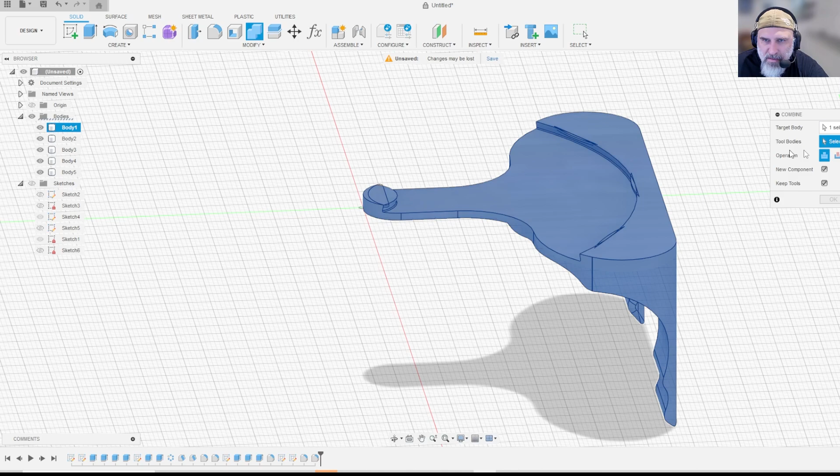Alright, so now let's hit this button. Let's combine all the bodies. Target body is this, tool bodies are this and this. Combine them, give me a new component. Hit OK. That way, because if I 3D print, it'll print all these as individual pieces and they won't stick together. So I need one single piece.

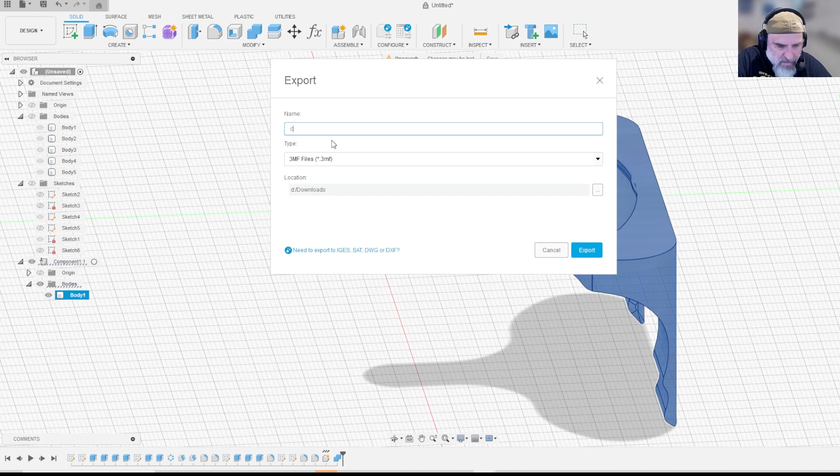Let's see, file export. What did I call this? CD shelf export. Open Bambu. Go back to prepare. Just move this one over here and open this one. I just wanted to have the old one there just to show you as a comparison.

Let's put this side at the bottom. You can see the neck's a little thicker. Hope you can see the geometry. Just trying to find a good angle. See a little curve there and there. Hopefully that'll hold the CD in a little better. It's got a recessed, rounded edge as opposed to just curved off.

Alright, delete this one and we'll go with... let's change the color, make it gold, shiny. Preview... oh, I need to give it 42 minutes.

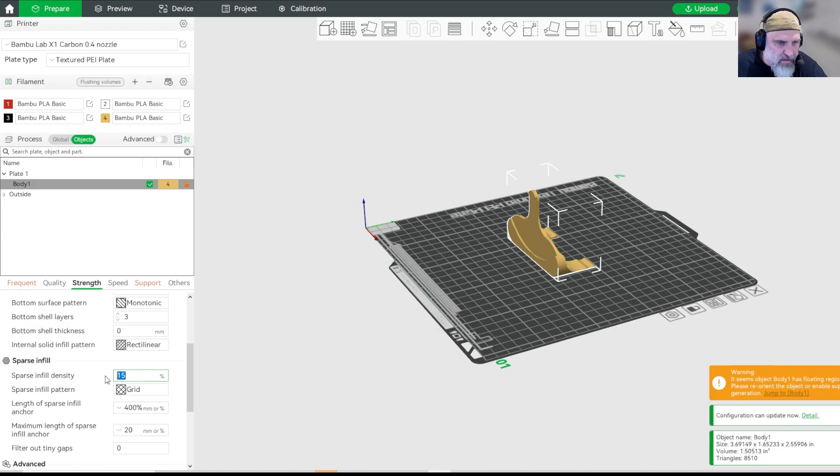Alright, let's go back here. Give it just some support, make it a tree, bed only strength. Put it back down to 8. Maybe it'll give me a few minutes less. Wasn't it 40? Oh, because I didn't have the tree support. See, now the tree has to support the lip. Because the lip wasn't as big last time, I didn't need to worry about it.

Anyhow, I'll be back in 45 minutes and I'll show you what it looks like.

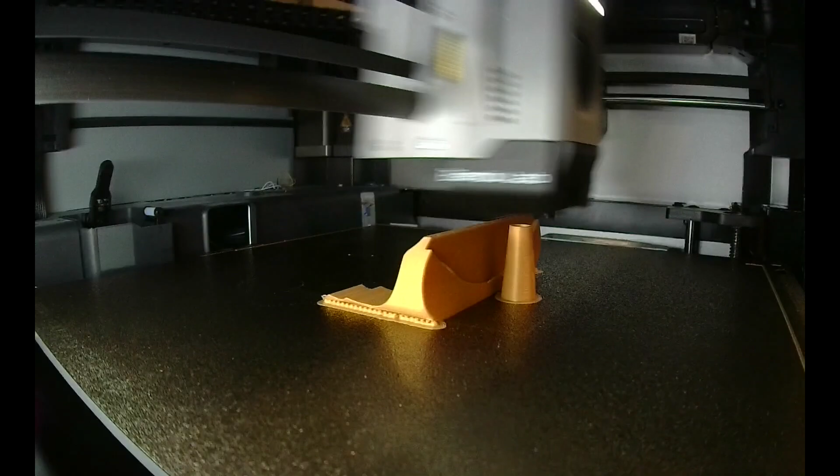An hour compressed into 15 seconds, and you know what you get? A little part, it's kind of funny looking. I guess that's not much to look at. But if you jam a CD into it, I get a shelf that stays in pretty easily.

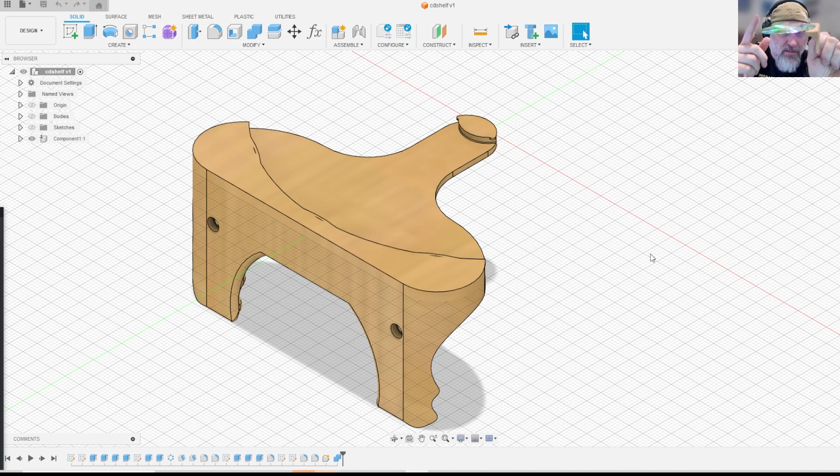Don't have to worry about it falling out, I guess, even if I lift it up. And then I got little... guess I could set up a second camera. Two little screw holes, make a couple of these, build some shelves.

Put a little action figure or something, Legos on them. Nothing huge, because I mean it's literally just a CD. But this way I don't have to print an actual shelf, I just have a little container. Snap it in, stab myself with a screw.

I would screw them in the wall, but it's like 1 o'clock in the morning right here, and I don't want to wake up my kids. But damn,

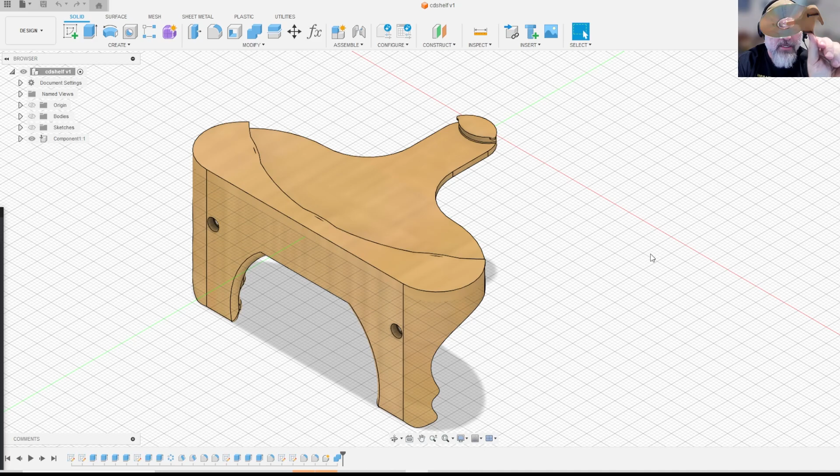Anyhow, that was fun. Something quick, simple. Fusion 360. Have a good day.